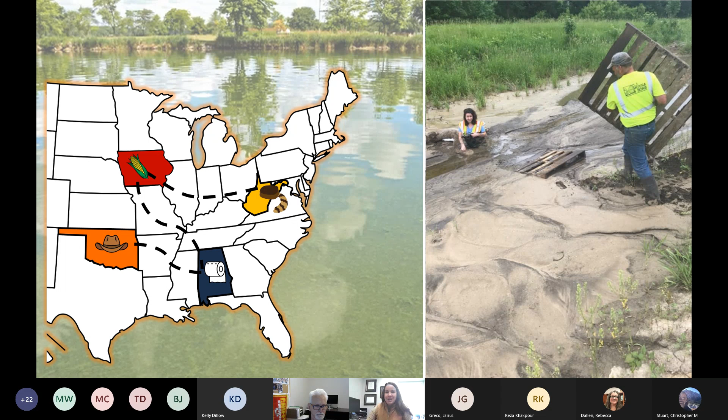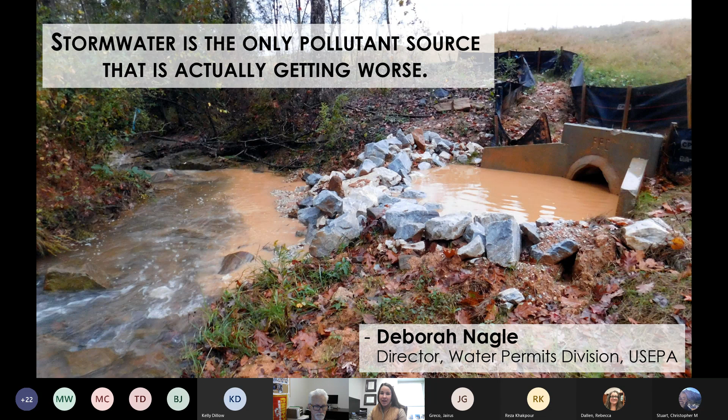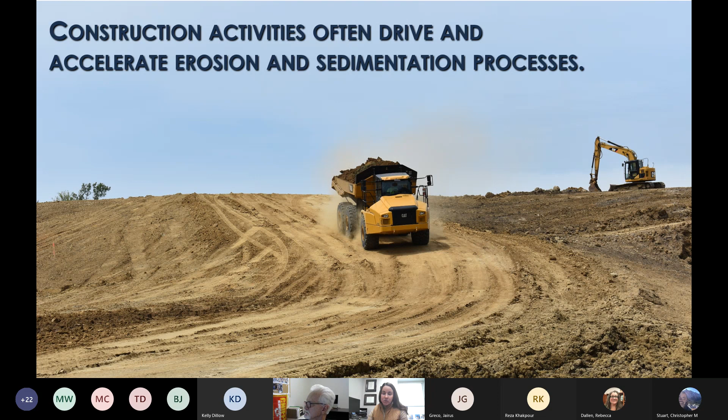Now, I'm sure we all know at this point, by attending the webinar series, that stormwater is a pollutant source that actually is continually getting worse, and that's because we're constantly changing the landscape to match our needs. And with that, we're doing a lot of construction and opening up and disturbing our land. Now, our construction activities can often drive and accelerate erosion rates and thus the sediment delivery to our waterways. Now, erosion rates in construction are 1,000 to 2,000 times that of a naturally vegetated area and about 20 times that of agricultural lands.

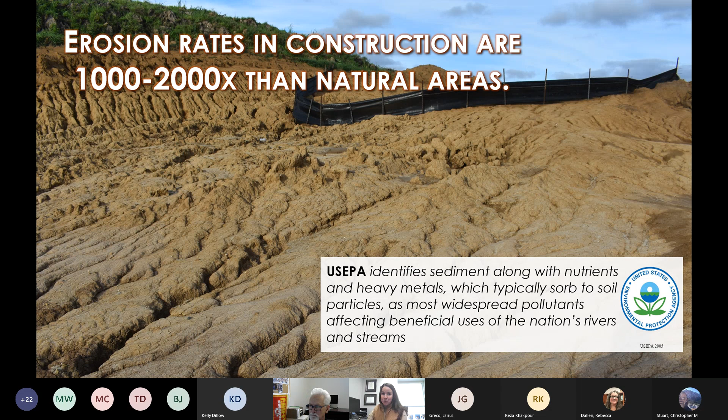Now, the U.S. EPA identifies sediment along with nutrients and heavy metals as one of the most widespread pollutants that are affecting the beneficial uses of our nation's waters. Now, this is when we start talking about water impairment. And impairment indicates that there are limitations for our recreational use, consumption, and support of aquatic life. Now, sediment pollution is our main pollutant here in the state of Oklahoma.

Now, today I will be focusing in on the erosion and sediment control techniques that we may be able to use during construction to try to mitigate this and minimize our downstream impact. Now, the U.S. EPA has the National Pollutant Discharge Elimination System, and there are several areas under this program, one being construction and then also our industrial and municipal programs. Now, within the construction general permit, or the OKR 10, as we call it here in Oklahoma, we are required to have a stormwater pollution prevention plan, and this includes the design, installation, maintenance, and location of our erosion and sediment controls that are used during earth disturbing activities.

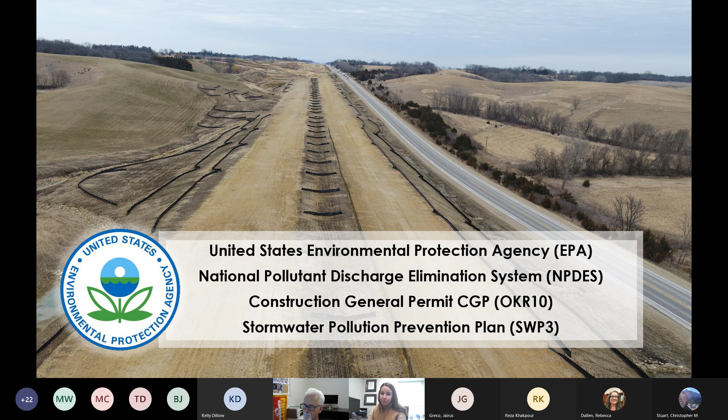However, there's a big divide when it comes to the design, installation, and maintenance. Designs may differ from state to state, regionally, but they also may differ within the state, depending on which municipality you're operating in. Now, a lot of times we're seeing that even if the designs are quite good, we might have a problem with improper installation or lacking maintenance. Many times, erosion and sediment controls are implemented based on the rule of thumb or what's been done in the past. However, they lack performance data and field-based testing.

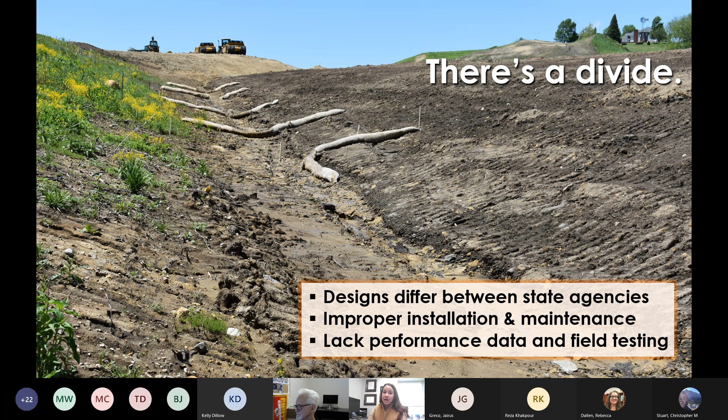And so that's where I have really come into the field and taking on some of this as research. Now, I started a research project with the Iowa DOT back in 2018, and this project aimed to assess the current practice of erosion and sediment control, and then also make modifications that may improve the performance. Now, the first step in this was to compile and catalog practices that were applicable during DOT construction, then install and evaluate these practices and be able to characterize their performance, and then make observations on any shortcomings and try to develop modifications to address these.

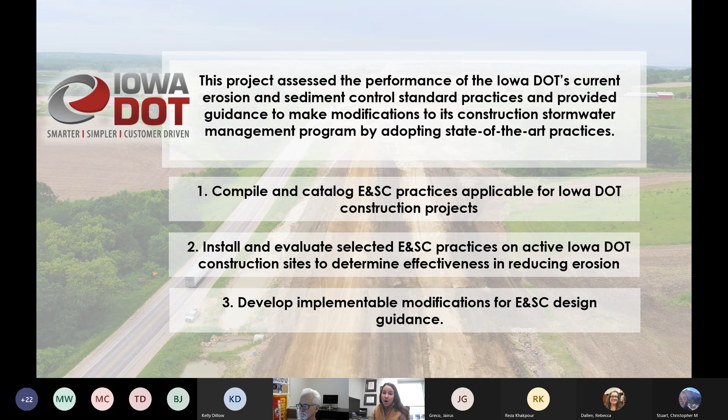This specific project for the Iowa Department of Transportation was called Field Monitoring of Erosion and Sediment Control Practices and Development of Additional DOT Guidance.

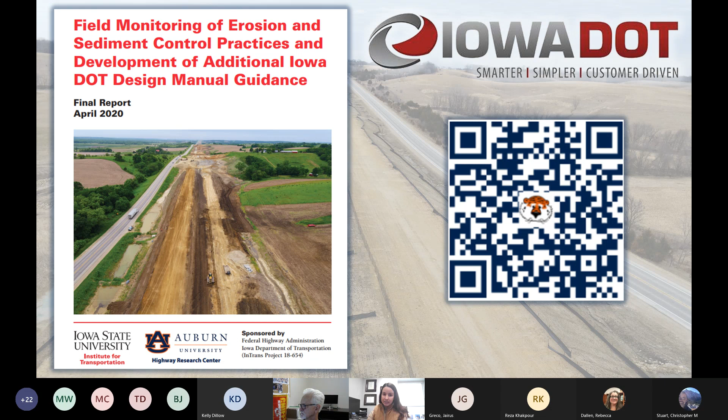The very first thing we did with this project was take several site visits to various projects throughout the state and cataloged what erosion and sediment control practices were most reoccurring between each project, but also problematic.

Some of the cataloged practices we came up with are shown here in this picture, including silt fence sediment barriers, ditch checks - which included both silt fence and wattles - and finally our detention practices, or what we were calling sediment basins.

Here you can see an example of our ditch checks on the center line. We have our sediment barriers on the perimeter and down just a little bit, and we also have several sediment basins all along this channel - one back here, one up here. So several different practices are used in a single span of DOT construction.

So the first one I'll be getting into is talking about those silt fence sediment barriers.

When we took a walk along the site, we saw a lot of sediment capture behind our silt fence. However, lacking maintenance caused a lot of these T-posts to deflect. We had silt fence laying on the ground, which was a pretty common sight, and I don't think that's unique to Iowa - pretty much any state I've been in has had problems with silt fence. They build up, and the pressure from sediment along with holding back the water - the hydrostatic pressure - is just too much for these materials, and they end up failing.

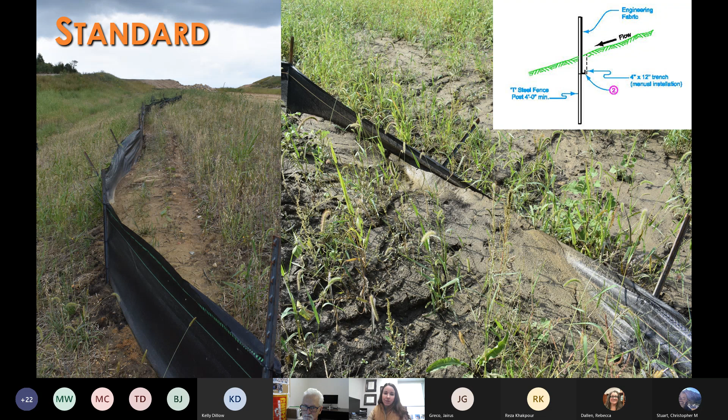The silt fence was a geotextile material simply attached to a T-post, spaced 8 feet apart. Our first modification was to close the spacing on the T-posts a little bit, decreasing that spacing from 8 feet to 4 feet, and then also have a 6-inch offset of the geotextile material before it was either sliced or trenched into the ground.

That offset allowed the material to stay trenched into the ground, and your sediment-laden water would flow over top of it - this prevented that material from dislodging from the ground, and helped prevent any undercutting that might occur.

Closing in that spacing with the T-posts meant they occurred more frequently, and thus were able to stand up to the pressure a little bit more. So we saw a lot less failure, and you can see here our silt fence is filled up to the very, very top with sediment. Although this would still need to be maintained, there was no T-post deflection or failure on the silt fence.

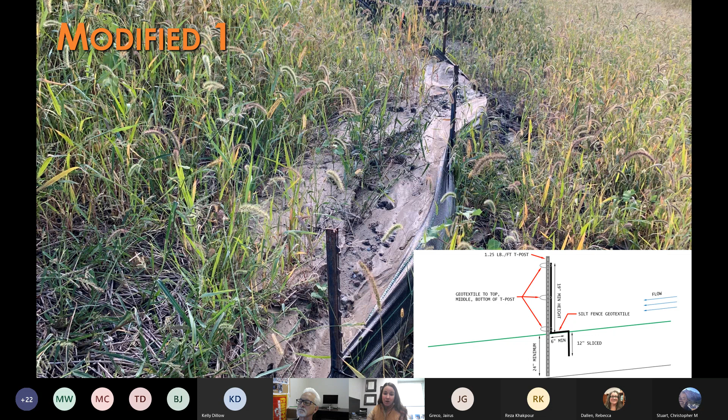Another option we came up with was what some states call the heavy-duty silt fence. This would be reinforcing our silt fence with wire reinforcement, or chicken wire. The geotextile was then attached to the chicken wire every 1 foot rather than 3 pinned locations to the T-post. You can see here there's a lot of sediment captured behind that silt fence.

So this was all visually observed - we were really able to improve the structural integrity of these sediment barriers and capture a lot more sediment upstream.

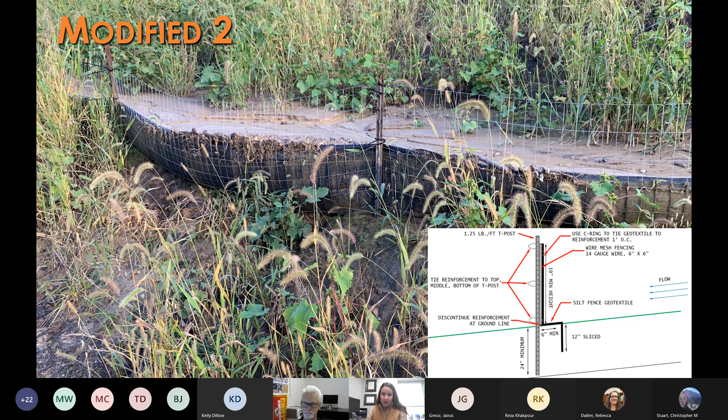Just based off of these visual observations and also contractor input, we were able to adopt some of these installations, one of those being the offset as you see here. We actually were able to influence Iowa DOT standard designs based on the findings from this field monitoring effort. So depending on the location of that silt fence, we might vary the T-post spacing and close it in a bit, and then include that offset that prevents any undercutting or the geotextile being dislodged from the ground.

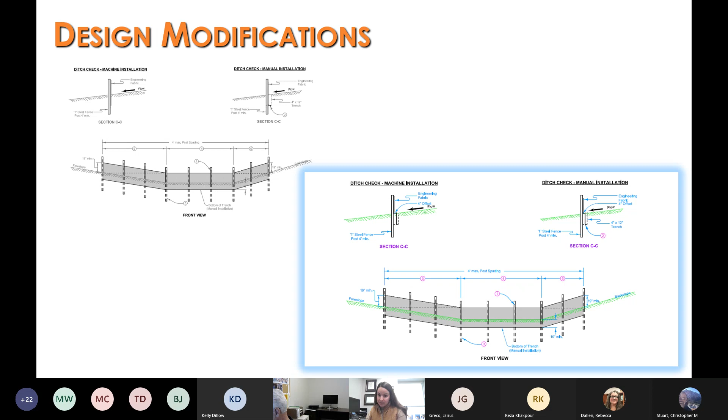The next cataloged practice that we saw were those ditch checks, again here in the center line of this picture.

We were using predominantly silt fence, but also some occurrences of wattles and rock check dams. These were the three major types of ditch checks that we were seeing on site.

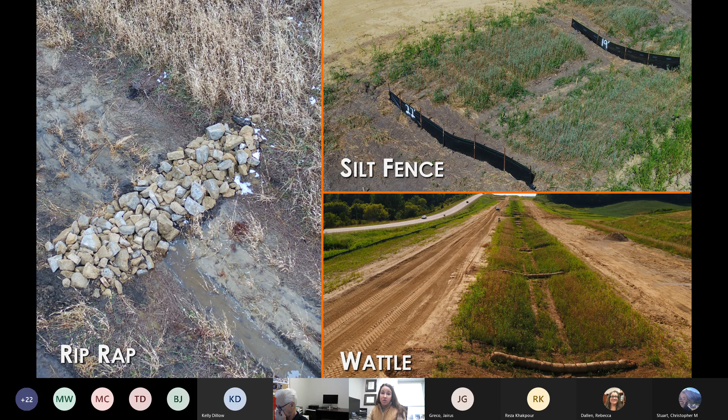We relied very heavily on UAV photogrammetry, so did quite a bit of analysis with our UAVs, and then also just some regular ground survey.

To go over what a ditch check is, we view it as both an erosion and a sediment control. Ditch checks are typically installed within a conveyance structure channel to reduce the flow velocity. These then reduce the erosive or shear force within the channel, and they should also create slow impoundments that are favorable for sedimentation of our largest particles.

When we were on site, just like the sediment barriers, we saw a lot of downed silt fence. They were using silt fence ditch checks, and with the hydrostatic pressure coming through that channel and the high flow velocities, we were seeing these washed out. But also, we just saw a lot of sediment buildup behind them.

So again, we started looking into literature, what other states might be doing, and how we could improve the practice in the state of Iowa. We field implemented various standard and modified ditch check designs to see how they would perform on our site.

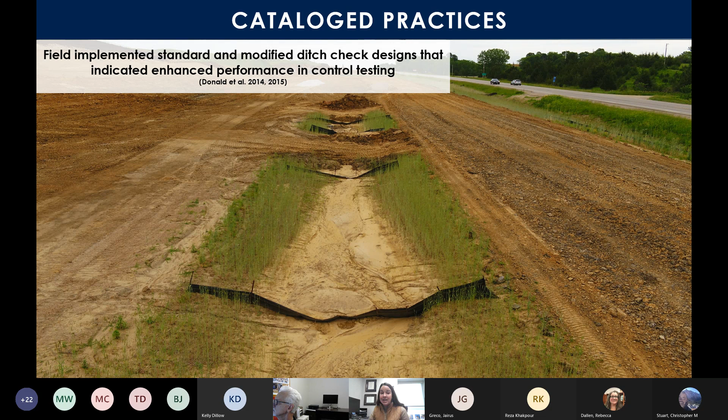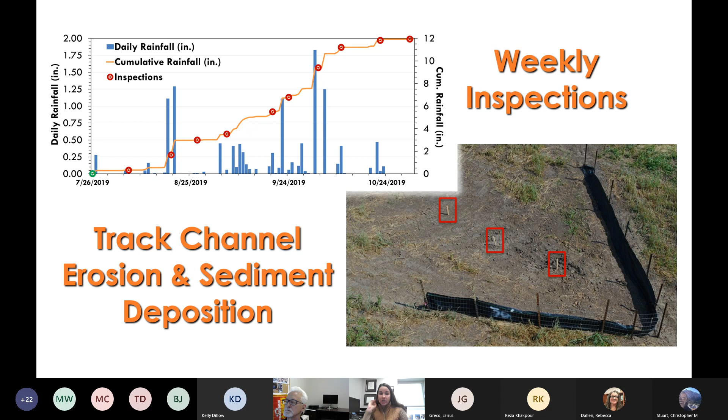We did weekly inspections, looking at visual observations, but this time we were also quantifying the rainfall occurring on site, and we were tracking channel erosion and sediment deposition with various surveying and LIDAR techniques. The first silt fence ditch check we looked at was the Iowa DOT standard at the time.

This was just a silt fence installed perpendicular to flow within a channel. You can see in this picture that there was certainly some sediment buildup behind the silt fence, but again, we got a lot of T-post deflection on the center line, where our flows would be most concentrated.

Eventually, this caused that geotextile to pull out. If you follow the flow path here, you can certainly see signs of undercutting. If this was not maintained, then we could expect that this silt fence would eventually wash out, and that was the case in many areas of this site.

So when we were tracking sediment deposition, we ended up getting just about half of a cubic foot of sediment, and that was after 12 inches cumulative of rainfall on site.

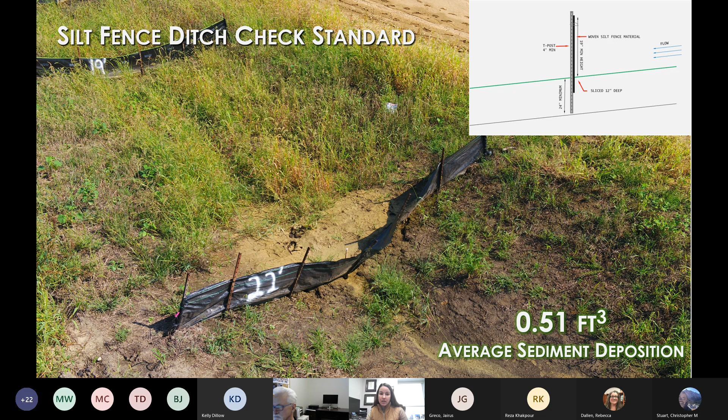Now, when we started looking at what other states are doing to be able to use silt fence in channelized flow conditions, we found some very unique installations, one being this V-shaped installation. I want to add that the silt fence is in a V, but it also has that chicken wire or wire reinforcement behind it to help with the hydrostatic loading.

Additionally, the geotextile is cut down just a little bit at the center point so that the lowest point of the V is right there at the vertex, and that allows us to know where the silt fence is going to dewater or overtop. If that silt fence is full with sediment and water, we know that our flow will be coming right over what we're calling the weir right at the vertex.

That allows us to provide some energy dissipation right here so the flow can keep moving down or stair-stepping down that channel. So we have our V shape with some wire reinforcement and then a weir right at the vertex.

And we were able to capture two cubic feet of sediment, so that's four times what we were able to capture with the standard. There were no signs of failure or incompetencies when we were looking and comparing after the same amount of rainfall on the same site. This one was just installed a little bit further down the channel.

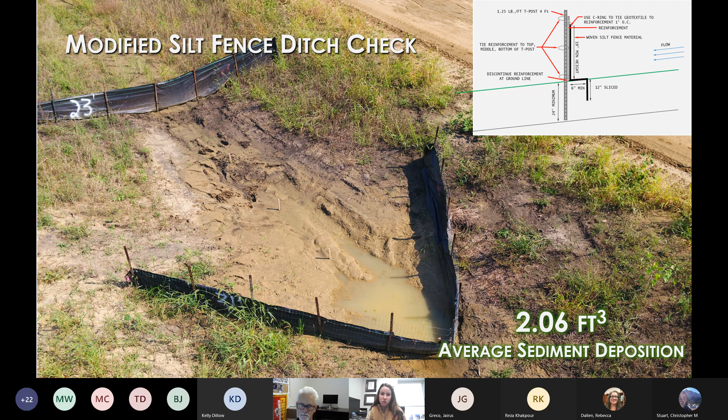So the next practice we looked at was also sticking within ditch checks, but looking at wattles. Wattles were really popular due to their ease of install on the site, again just installed perpendicular to the flow path and staked directly through the media.

Now, if these were not installed properly, we saw a lot of signs of undercutting, and that's evident here in this photograph. We have some sediment accumulation up here, but our flow is going down and we're undercutting that wattle, and that's evident based on the erosion within the channel.

So we were able to look at the surfaces and again quantify how much sediment was being captured, and here we were just at about one-tenth of a cubic foot of sediment deposition.

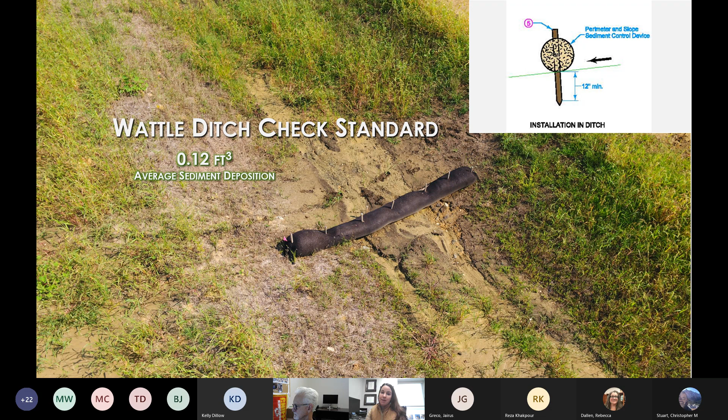We wanted to see what we could do to prevent undercutting and help the wattle stay anchored down into the ground, maintaining intimate ground contact and ensuring we are impounding behind the practice. At the time, the Iowa DOT had a big push to use natural materials within the channel in case they were left behind, so we took an Excelsior fiber matting and put it down in the channel. We were then able to sod staple the bottom of the wattle down through the netting into the channel, lay the wattle down, and use a TP staking configuration. The stakes did not pierce the wattle at all; they were crossed in an A-frame, which kept pressure down on the top of the wattle.

Wattles are often made of light natural fibers, maybe straw, maybe an Excelsior fill, so they're very lightweight, and in high flow conditions they can become buoyant. With this TP staking, we're putting pressure on the top, making sure the wattle stays down on the ground even in high flow. You can see here we have quite a bit of sediment buildup and no evidence of the undercutting we saw on the standard design.

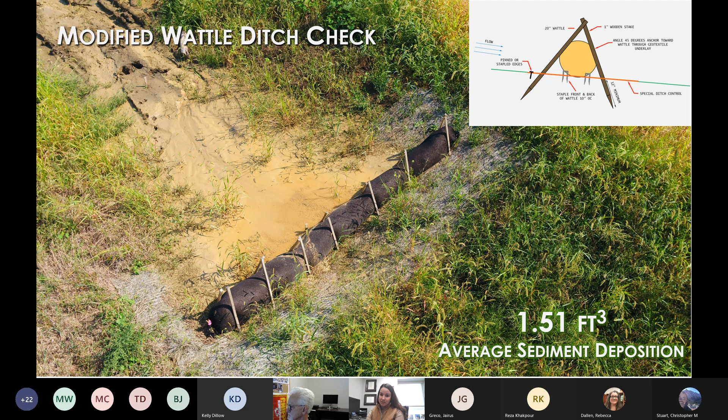We were also able to get a lot more vegetation to establish in the channel downstream. This provided 1.5 cubic feet of average sediment deposition after 12 cumulative inches of rainfall on the site. So with a 20-inch wattle we were able to capture almost what we were able to capture with the silt fence installation—quite a bit of improvement there.

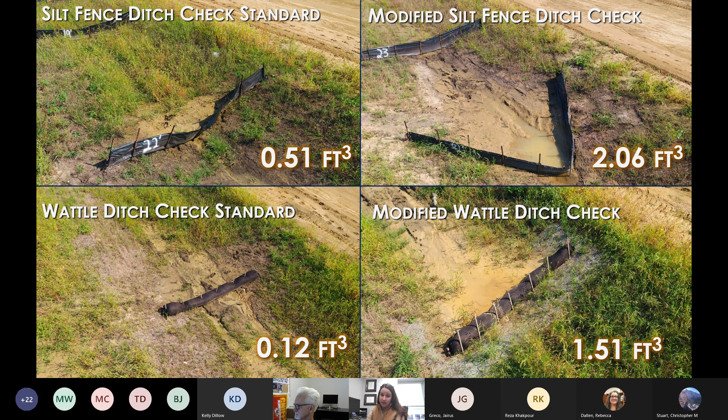So across the 4 monitored installations, we changed the silt fence standard to the V shape with reinforcement, and changed the wattle ditch check standard to implement a TP staking configuration with a natural fiber underlay to promote ground contact. We were able to enhance sediment capture in this case by 4 times, and with the wattle by nearly 12 times. Again, the DOT took these findings seriously and wanted to improve their stormwater management plan.

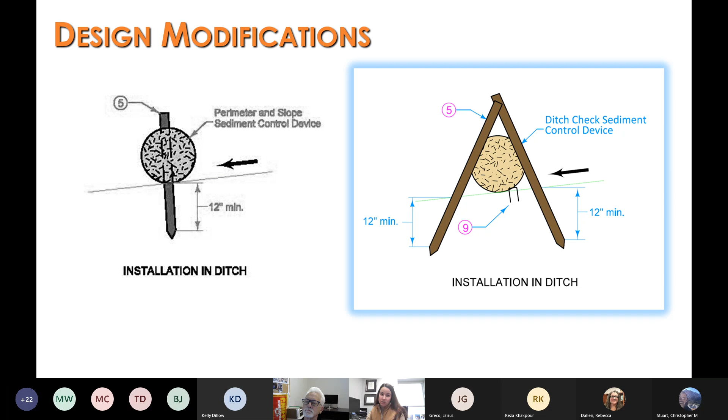So we saw another change in the design standards, going from the standard wattle to a modified installation using non-destructive staking, including the sod staple and the natural fiber underlay. At this time, the silt fence ditch check has not been modified, due to looking at the additional costs of the other design components, including the wire reinforcement, and also educating the installers and getting their feedback on whether it would be feasible to install ditch checks in that V installation.

So we applied various design and installation techniques and saw quite an increase in sediment retention. Modified practices significantly improved sediment capture based on our statistical analysis. This is really important because this site was a 12-mile-long DOT project, with over 3,500 ditch checks included in the stormwater pollution prevention plan.

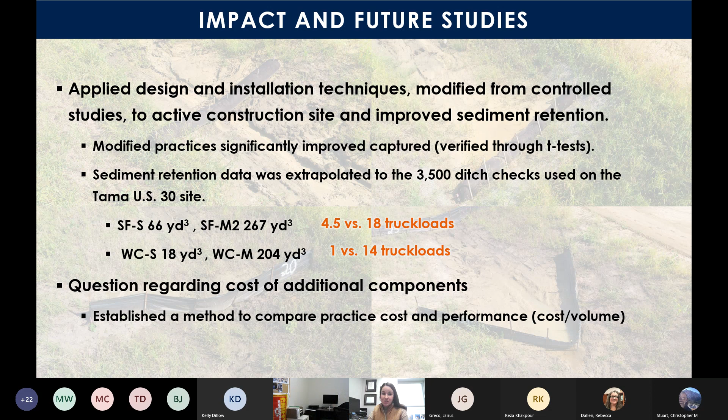When we compared how much sediment would have been captured had all the ditch checks been improved, we were able to go from 4.5 truckloads to 18 truckloads of sediment captured on the site with the modified silt fence. When we did that comparison with the wattles, if we continued just using the standard wattle practice, only 1 truckload of sediment would have been captured on site, whereas with the modified installations we could have captured up to 14 truckloads. However, there was a question about the additional cost related to these design components.

That was a very interesting question, one we wanted to answer for the DOT. So we did a cost analysis looking at additional material cost and additional labor costs, since more design components mean an increase in installation time. We compared what that total cost would be against the volume of sediment captured on site, and we could actually see that the cost per volume decreased with our modified practices.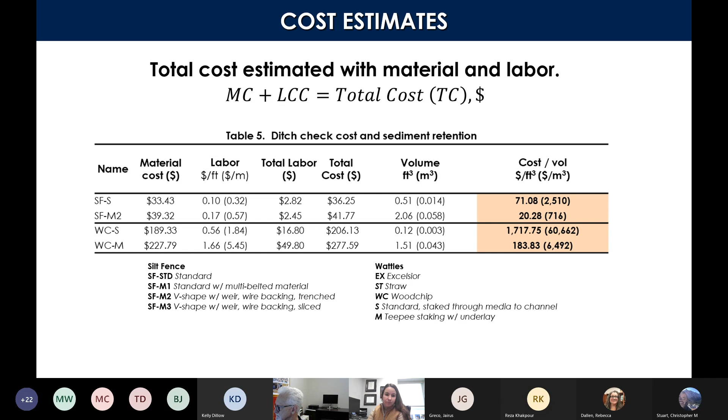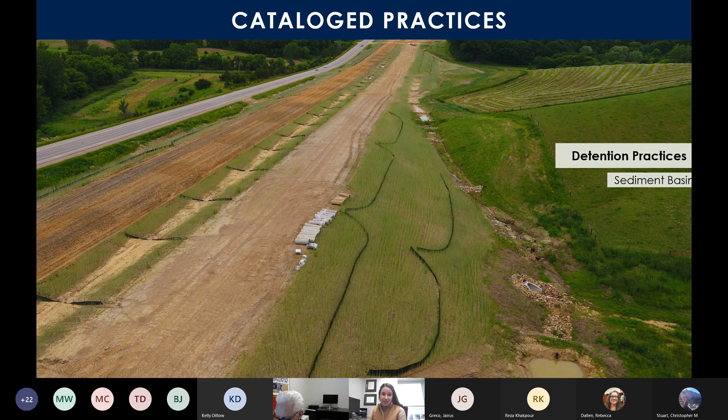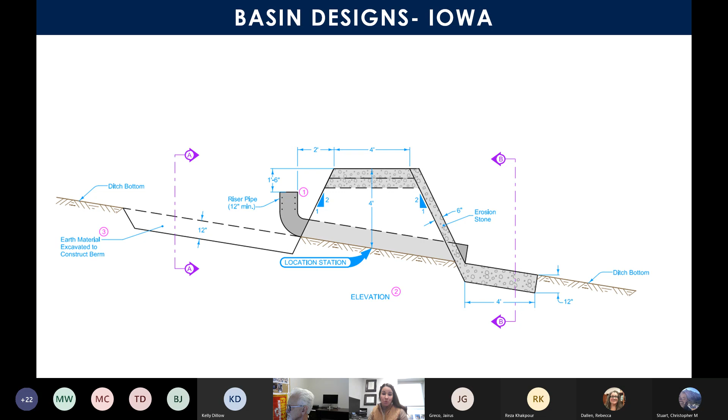The next cataloged practice we found, which I previously mentioned, were detention practices or sediment basins. The Iowa DOT had a very unique design here, creating sediment basins or detention areas within a conveyance channel. They did this by building a small earthen dam across the conveyance channel and running a riser pipe through that dam for dewatering. The earthen dam was armored with erosion stone to prevent erosion on the top or back side of the dam, and there was a low point to serve as the auxiliary spillway. You can see what a freshly installed in-channel sediment basin might look like.

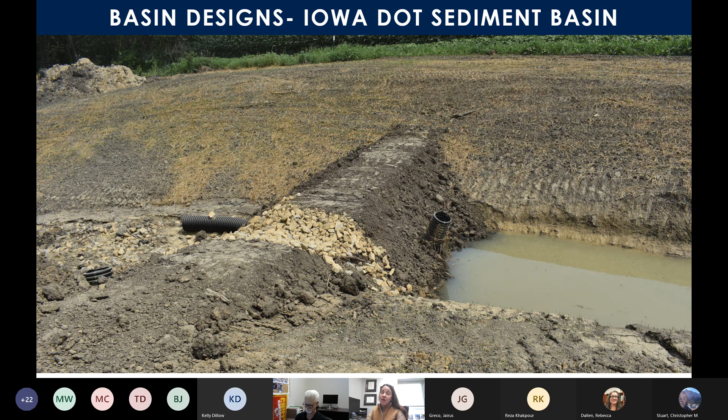When I looked at this picture, I saw many areas of exposed soil. Again, we're in a conveyance channel, so we may have high flow velocities that could cause erosion within that channel. It would be really important to get these sides stabilized with some sort of vegetation or matting.

Now, it was no surprise that over time we started to see some issues. Our channel was eroding, our sides were eroding. We actually had problems with our dewatering risers becoming buoyant and being dislodged from their position, not serving as the primary dewatering area. Now, one thing in this picture you can also see is our earthen dam.

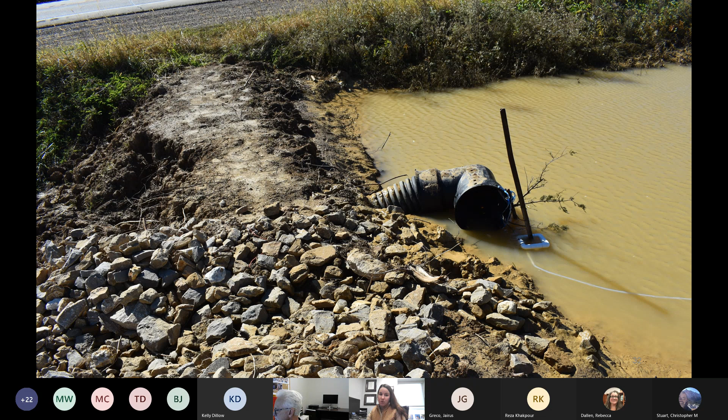Well, there's some other low points, not just through that auxiliary spillway, that's causing a lot of erosion on the back side of that dam. So our sediment loads were going to be even higher leaving the basin than what was coming in.

And over time, this is what that looked like. Even with the dewatering riser pipe maintained and put back in its place, we were just getting overtopping on that dam in other locations, and the erosion was very, very severe.

So we field monitored these sediment basins. We first monitored a single sediment basin, both at inflow and prior to discharge off-site, and then also sediment basins in series, where one sediment basin discharges and flows into another for enhanced residence time and sediment capture. In both cases, we were getting very little turbidity reduction.

Turbidity is our clarity of water. And when we talk about turbidity, it's much like golf: the lower the score, the better the water.

A lot of times our influent turbidities were at 10,000 NTU, and maybe after residence we were getting about 100 NTU removal. In many cases during storm events, there was no turbidity removal at all.

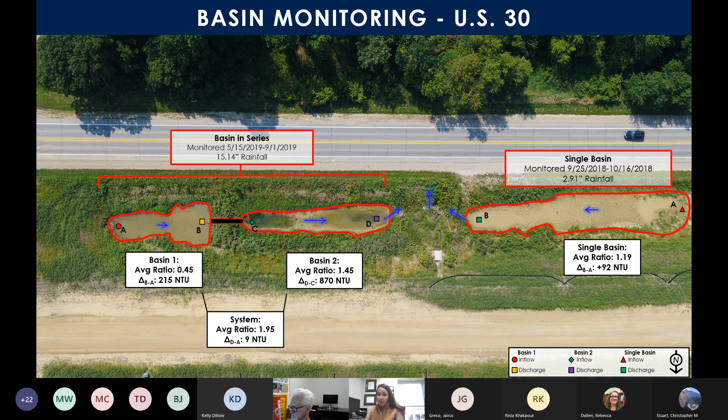And these basins were quite expensive to install. Depending on where they were, the price was anywhere from $2,000 to $3,000 per basin per contract. So it was a lot of money being invested for very little effect.

However, when we started to think about the principles of detention practices and this design, we did see several benefits. One being that they use existing site infrastructure. Another being that the length-to-width flow path is increased, which past literature shows helps capture sediment and stored pollutants. Because we're already using existing site infrastructure, and these are long, skinny channels, we also have a reduced requirement for acquiring right-of-way on the side of our road.

And all of this contributes to a reduced cost. Now, there might be site constraints that prevent a traditional excavated pond, and being able to create a detention area in a channel might be beneficial. So we wanted to see about ways that we could use this idea, but enhance it to also provide water quality improvements.

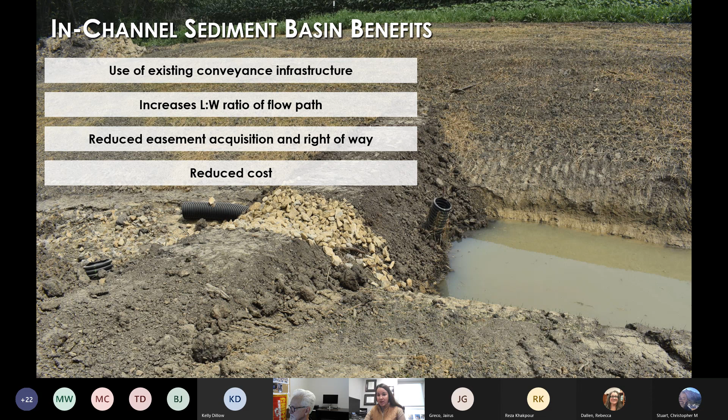So when we started to think about what makes an effective sediment basin, we knew that at the bare minimum there had to be some sort of stabilized inflow channel, an area for settling to occur, a primary dewatering system that would allow the impoundment to dewater at a controlled rate, and then also an auxiliary spillway in case the settling pond was full or overflowed.

We also have a surface dewatering system, such as a skimmer, and that allows the water to dewater from the top of the water column, which presumably is the cleanest or has had the most time for sediment to settle from.

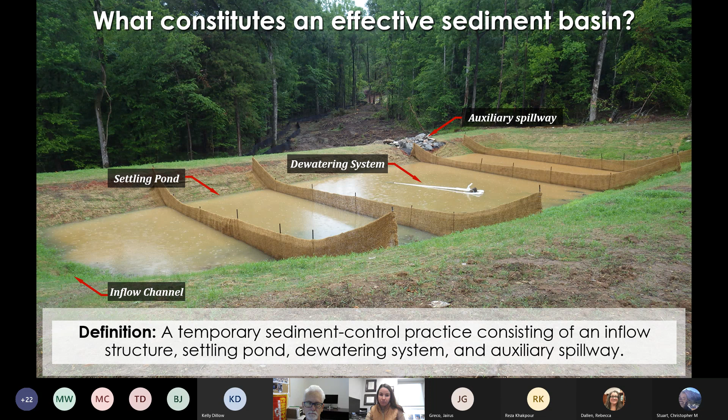So we moved on to a second stage of this project. We did our field monitoring effort, and now we wanted to see the performance based on controlled testing. The second project was titled The Evaluation of Sediment Basin Performance Using Large-Scale Testing. This evaluated the standard and several modified sediment basin designs at the Auburn University Stormwater Research Facility.

The first objective of this project was to develop a sediment basin that mimicked field scale and the hydrologic behavior of field-installed basins from Iowa. The second was to understand the sediment retention and the turbidity reduction in response to various sediment basin components or treatments. And then finally, look at the cost and develop implementable recommendations for the Iowa DOT.

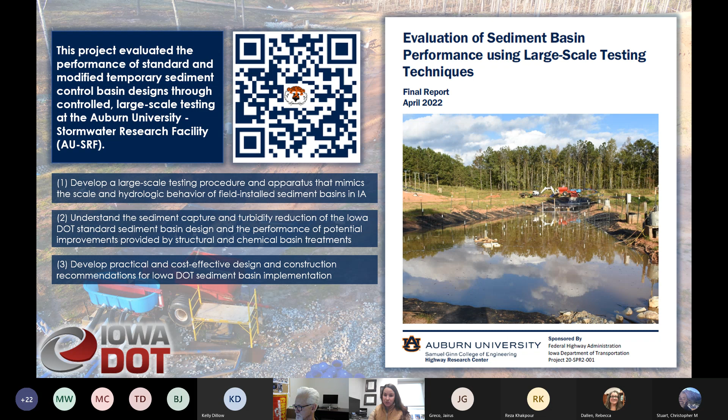Now, as I mentioned, we were doing a project for the Iowa DOT. However, this project was going to be occurring at the Auburn University Stormwater Research Facility. Auburn is based in Alabama, so we wanted to make sure anything we did was mimicking the rainfall and runoff situations similar to Iowa, and also using soils or sediments representative of the area. The facility was previously the Erosion and Sediment Control Testing Facility.

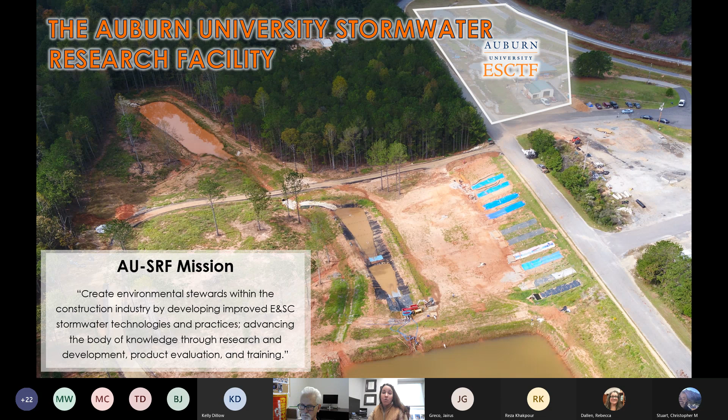It's housed right next to the National Center for Asphalt Technology. The Auburn University SURF, as we call it for short, mission statement is to create environmental stewards within the construction industry by developing improved erosion and sediment control technologies. The fun thing about the facility is that you can mimic construction sites, but you're able to control the rainfall, the grading activities, and everything going on around your practices.

Now, when we started looking at how to evaluate a sediment basin or what components we wanted to include, we came up with this testing regimen. The first would be to install a standard sediment basin following Iowa DOT guidelines, and this would be unlined. The challenge here is that in Auburn we have a different soil type, so we were going to have to deal with that. If erosion occurred within the channel or the basin, how could we make comparisons? So this first area, we looked at the standard basin using Alabama soils.

The next thing we did was line the basin to provide stability of that channel and also the sides of the basin with a geotextile lining. We repeated that testing with Alabama native soils, and we could make the comparison of what was happening between an unlined and a lined basin, showing what would occur if the basins were stabilized. The next thing we did was repeat that testing, except this time we were introducing soil shipped straight from Iowa. This allowed us to make the comparisons between the two soil types.

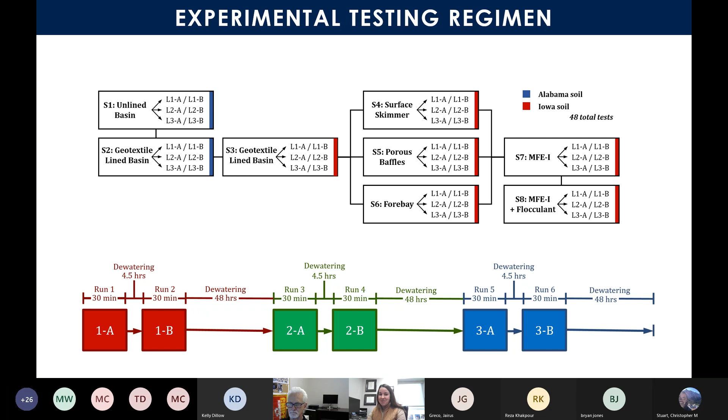Now, we introduced flow into the basin for 30 minutes, and then the basin dewatered for 4.5 hours before reintroducing flow again. This second period of sediment-laden flow introduction was to simulate what would happen if a second storm event came through when there was already some volume or some level of water within the basin. We repeated this testing 3 times for repeatability, and we were able to find some really exciting results.

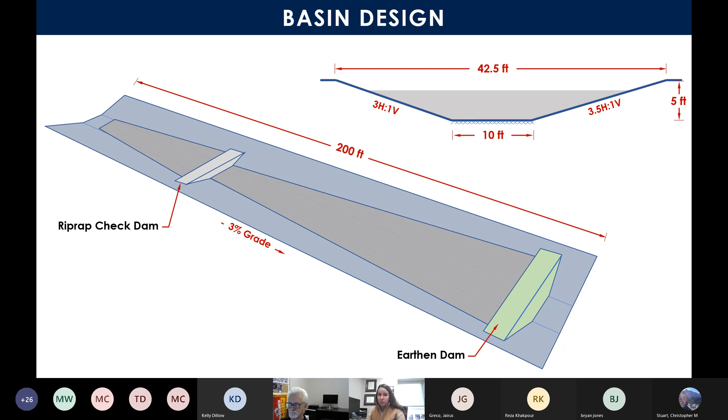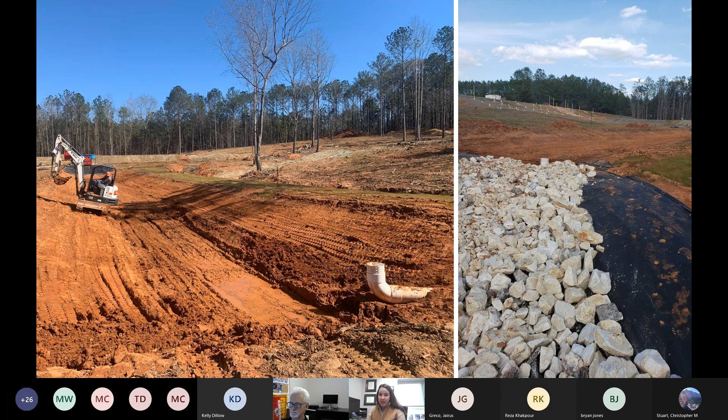So our basin was 200 feet long and about 40 feet wide at its widest point. You can see here the earthen dam that would be constructed to create our basin area, and then where a riprap check dam would be to create that forebay in later testing. We constructed that basin according to Iowa DOT spec, and you can see here our riser pipe sticking out. This is on the downstream end of what would be serving as our auxiliary spillway.

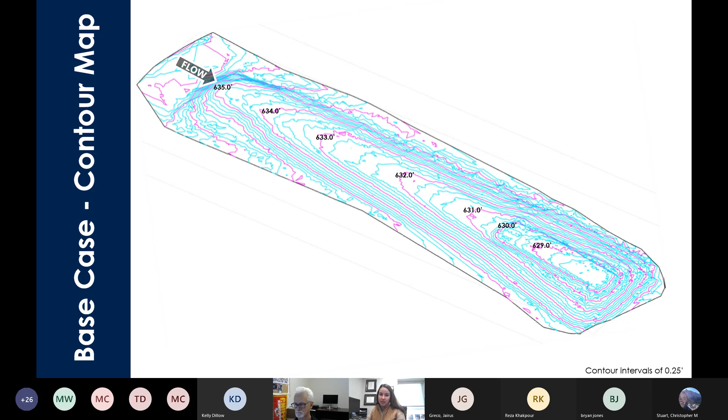We took a survey and were able to get our base case scenario that we would compare to later for sedimentation and also any erosion patterns within the basin. Now, as I mentioned, we wanted to be able to mimic the hydrology and also the sediment loss that might occur on an Iowa DOT site. So we did some GIS analysis to come up with our flow and our sediment introduction rates.

So we were introducing flow at 1.7 cubic feet per second and sediment at 62.7 pounds per minute. This was simulating about 1 acre, just a little bit less than 1 acre, of a drainage area that would be captured within the basin.

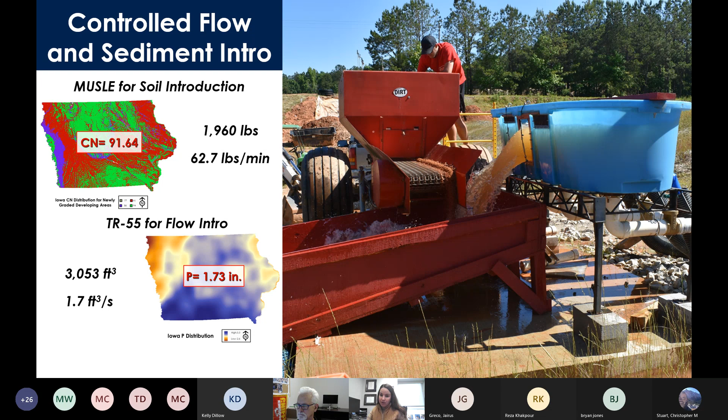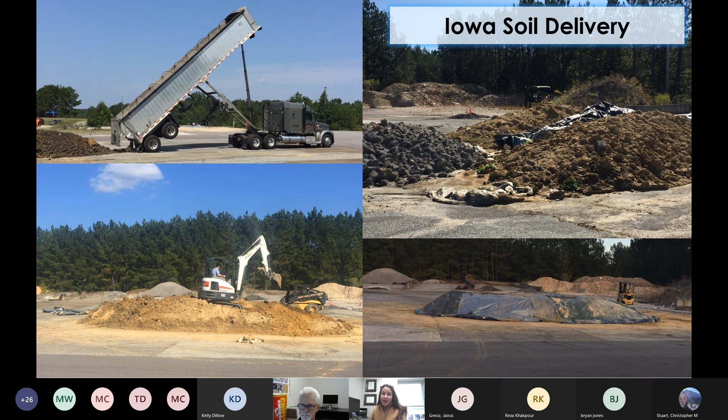My favorite part of this project is that I had to order 5 tractor trailer loads of soil right from an Iowa DOT construction site that was shipped down to us in Auburn, Alabama. The soil was taken from various different areas, so when it got to us, we dried it out and tried to mix it up to make it as homogeneous as possible.

So this is our sediment basin area. This is an aerial shot. So we have our 200-foot long basin with its widest point being here at dewatering.

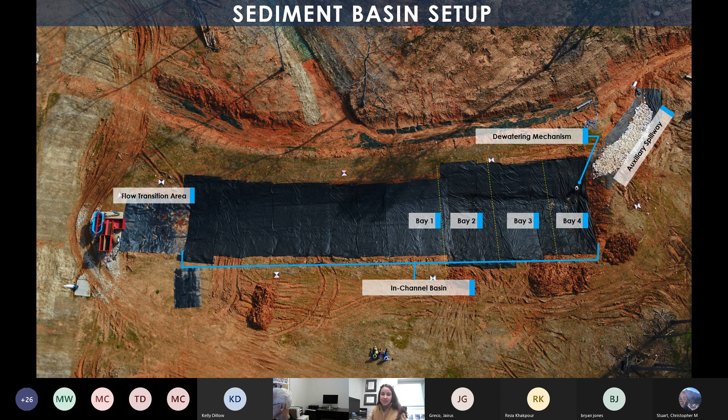You can see our riser pipes sticking up and then our auxiliary spillway. Up at the top, we have our flow and sediment introduction apparatus.

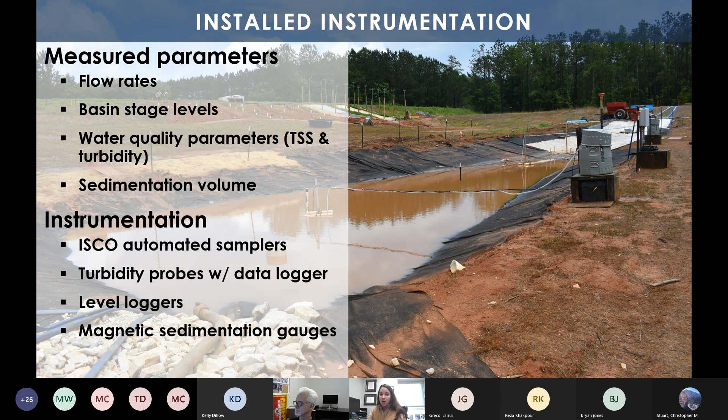We monitored various different parameters, including flow rates, basin stage levels, and water quality parameters, including total suspended solids and turbidity. We used various different instrumentation, including automated samplers for our water quality, which is what I'll be talking about primarily in the next few slides.

So as I mentioned, some of our treatments included lining, a dewatering surface skimmer, baffles, and a forebay. And as you can see here, the sedimentation patterns between these all look very different.

When we started talking to the Iowa DOT about what would be feasible for them, they really liked the idea of stabilizing the basin, implementing surface skimmers that would be quite easy, and then just putting in a rock check dam and covering that in geotextile to create the forebay area.

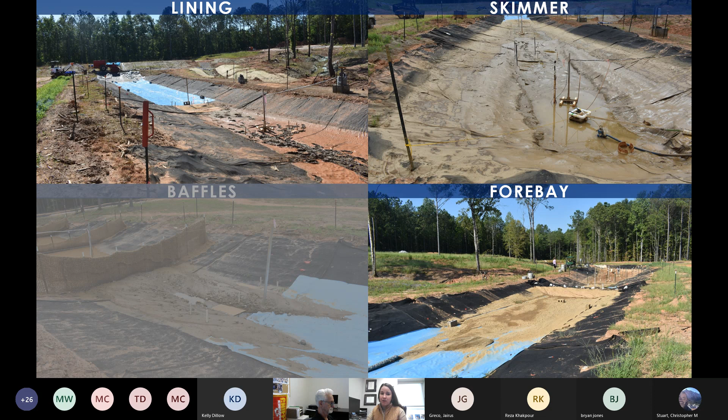However, the baffles in the basin were difficult to install and a little troublesome to try to maintain or dredge out, so they didn't see this being as feasible to implement on site. So when we evaluated our system, we removed baffles but kept the lining, surface skimmer, and the forebay.

When we started to compare sediment retention, we were able to get individually with the skimmer 88% sediment retention. That means 88% of the sediment introduced was retained within the basin. When we installed a forebay, we were able to get 89% retention, and with baffles, 84%. Because the baffles were lower and they were difficult to install and maintain around, they were not included in this system.

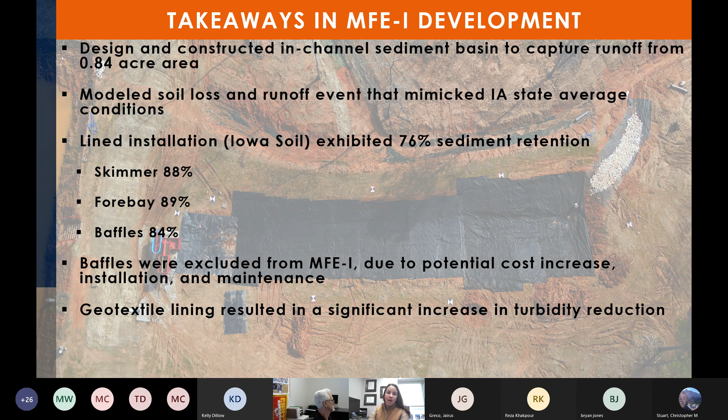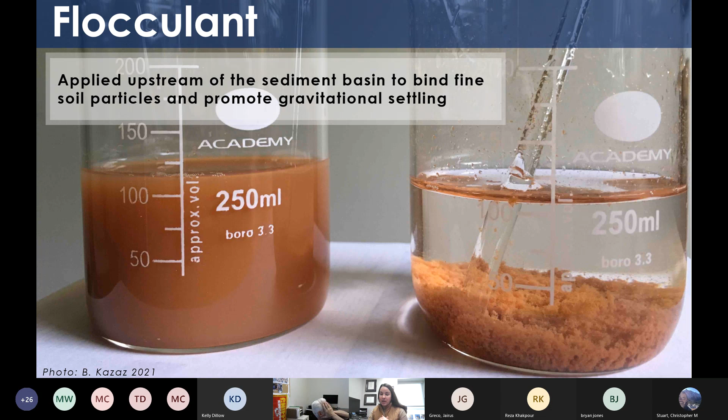Once we created the system, we tested with and without flocculant. If you're unfamiliar with flocculant, flocculant is applied typically upstream of sediment basins, and they act as a glue. They're able to get our finest particles, like our clays, to stick together. This creates larger particles that are able to settle from suspension much quicker.

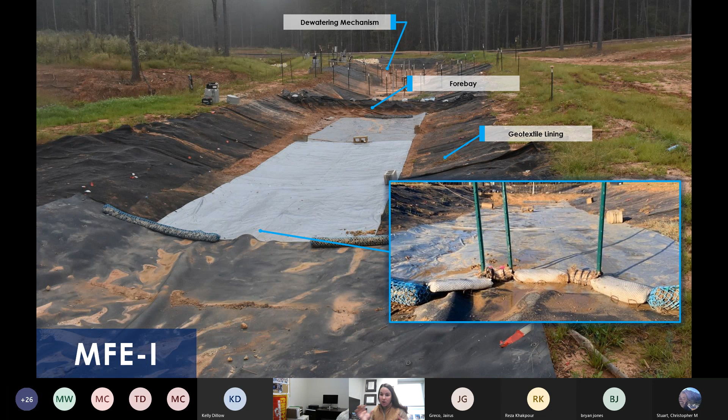When flocculant was used, we just used flocculant blocks that were very simple to install, put right in the flow path so that sediment-laden water passed over them and had time to mix and cause those particles to bind and settle from suspension. Now, as I mentioned, one of the parameters we looked at was sediment retention.

I spoke just a little bit about the sediment retention that we were able to achieve with individual components, but I want to highlight these top two rows here. The MFEI, that included the forebay, baffles, skimmers, and lining. We were able to get 96% sediment retention. That's quite a bit of sediment retention.

Now, when we added flocculant, we were able to increase this to 98%. That means that 98% of the sediment that was being washed through these basins was retained, and only 2% was yield, or what would be discharged from the site. So we were able to increase that from our baseline of 76% all the way to 98%. Very significant when it came to sediment retention.

When we started looking at water quality, looking at patterns of total suspended solids and turbidity, we saw very similar results. Each of these lines represent the turbidity at discharge. We monitored very closely for the first 2 hours, looking at every 2 minutes taking a sample. We also looked at extended dewatering over 48 hours, which was the current standard to dewater the sediment basins.

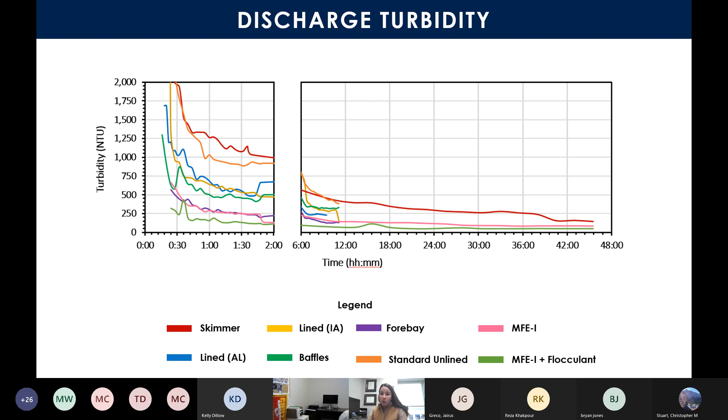Now, when we apply that flocculant, we're able to drop very rapidly, even during the filling period. That would indicate that during a storm event, if flocculant was used with all these other components, we may be able to reach any turbidity effluent limits required. So we're well under 100 NTU. We're able to achieve that very, very rapidly.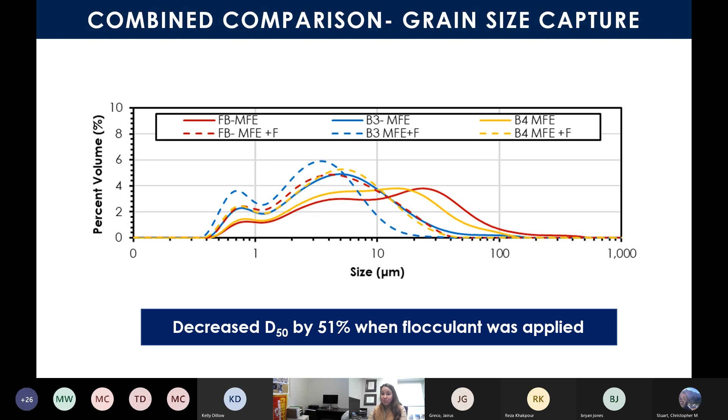The dotted lines represent when flocculant was also applied to that system. This general shift to the zero axis shows that the particle size is getting smaller. So when we use flocculant, we're able to capture those very fine clays or silts that we typically miss due to their settling velocities. When we put the whole system together, we were able to get 96% sediment retention.

However, when we use that system with flocculant, we could increase the sediment retention to 98% and improve turbidity reduction and particle size by nearly half. So basically, flocculant allows our finest particles to settle much faster, and this creates a potential to decrease the detention time or volume required in our sediment basin designs.

Flocculant might also help us achieve any numeric turbidity limits. There is some concern around residual flocculant concentration. So, flocculant is this chemical, and we're trying to keep chemicals and pollutants away from our waterways. If we're putting in flocculant, are there going to be downstream impacts?

Currently flocculants vary on the type, and that could be a whole other presentation. But there are very minimal downstream effects with the flocculants that we were using. Discharge concentrations were much below 10 milligrams per liter, and there's really no harm until you get above about 30 milligrams per liter. The way these are being dosed and used, we're really improving turbidity, which helps the health of our receiving waters and also helps our aquatic life when it comes to sight feeding and reproduction.